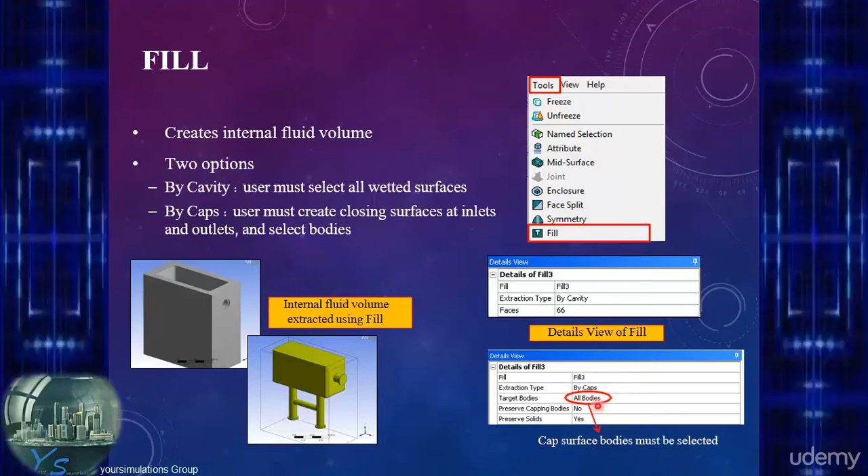Another option as far as creating an additional fluid region similar to the fill operation, but on the outside of the original solid body, is the enclosure tool, which is under Tools and Enclosure. And this will create an enclosure around the existing bodies. So once we opt for enclosure, it will automatically find a bounding box for the existing bodies in the simulation, and it allows you to place a cushion around the outside of the existing bodies, and will automatically subtract the existing bodies as well. So essentially we're then left with the fluid region around the outside of the original body.

So we select all the bodies to be involved in the subtraction. The shape of the enclosure, we have some control over the shape and also the extent as well, to control how long it should be. For example, if we're looking at flow over this aeroplane, we would want to ensure we have a large wake region to capture all of the vortices being shed from the back of the aircraft. And then the output would be a frozen body around the selected parts, based on the extents we specified in the inputs, and the internal flow would be the Boolean subtract result after the subtraction of the original body. But we can also support symmetry models if we need to slice it down the middle and only have half of the body, and we can have full or partial models to be included inside the enclosure as well.

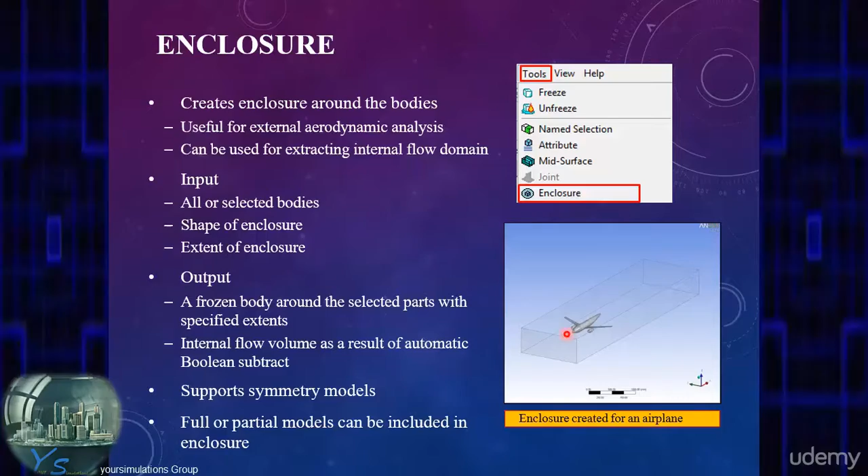So here's an example of using the enclosure model. We start with this plane model example, which is a solid body, and then we go to the enclosure tool and we can choose the number of planes to be used, in this case for symmetry. So we choose the plane that will be used as the XY, green, red plane for symmetry, and it will also do the slice in that direction as well. And we can see here the cushions, min X, max X, etc. for Y and Z in order to create the cushions. And this is the distance beyond the bounding box of the zone up to the boundary of the new enclosure. So it places a cushion around it.

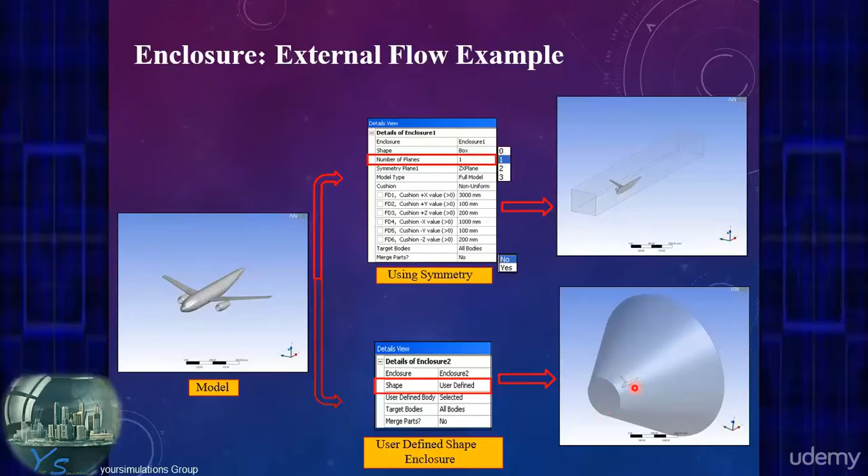We can also use the symmetry tool, which essentially will slice down the middle of the body in order to create half the body. You must bear in mind that it's possible that even though the geometry is symmetric, for a fluids calculation the fluid may not be symmetric. But in the cases where it's not unreasonable to assume a symmetry in the fluid and the geometry, we can slice the geometry into half. So here we have a tool which will do that operation. The inputs will be all of the selected bodies, which we can identify from the details view to be sliced. And we can also choose up to 3 symmetry planes if we have X, Y, Z as planes for symmetry for slicing. And the planes will then slice the model and we can remove the unnecessary parts.

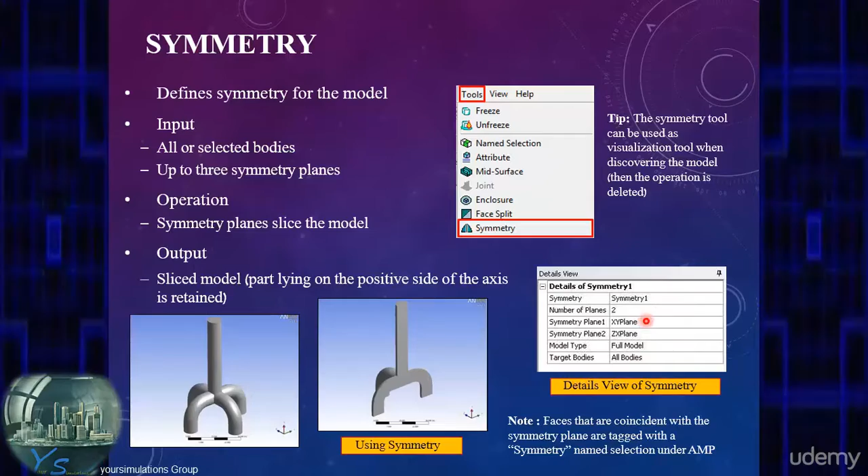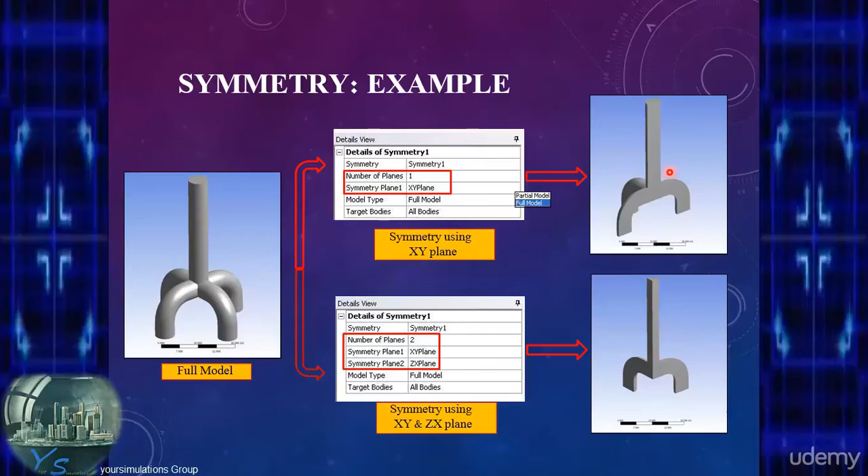So here we can see the details view, the number of planes. In this case we've selected an XY plane and a ZX plane, and all bodies to be sliced. And here's an example of this model that's a single pipe that's then split into 4 separate pipes. At the top we have one plane for symmetry processing, and at the bottom we have the 2 planes for symmetry processing, and you can see the effect of specifying 1 or 2 planes for symmetry and what's left in terms of a 180 degree half model and a quarter 90 degree model.